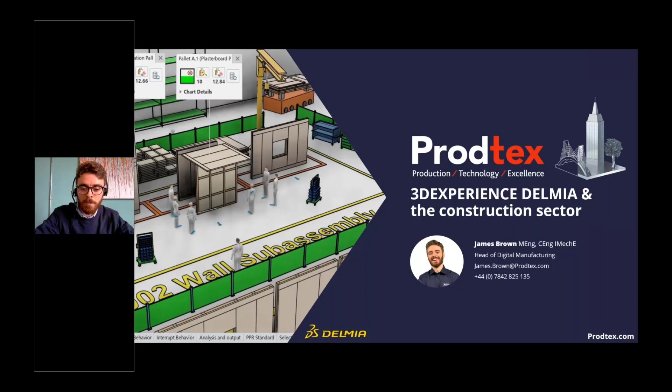Before we dive too deeply into it, for those of you who don't know who Prodtex are, we are a company based in Northern Europe. We specialize in construction, infrastructure, aerospace and automotive. Our prime focus is Delmia digital manufacturing, both as a license provider, a trainer of the software, and we also offer expert consultancy in how to use it and to help solve customer problems, which you'll get a flavor of through this series. And then just to mention it, we also do work in robotics and tooling. I always like to mention that as it means we're not just using the software, we also understand the same issues you go through as manufacturers as well.

So as Ricky said, really exciting 2 weeks. We've got 2-3 weeks we have planned for this webinar series. This is going to run through a range from factory optimization off-site all the way through to on-site ergonomic assessments and on-site simulations. Today's session, we're going to kick off with an introduction to 3DEXPERIENCE Delmia to really kind of give you that grounding for the rest of the webinars.

So in this specific session today, we're going to run through some of the key trends that we've seen in construction from our point of view. This is based off work we've done with different customers and the trailblazers on the call. And I spotted some of you in the attendees, so thank you, you know who you are.

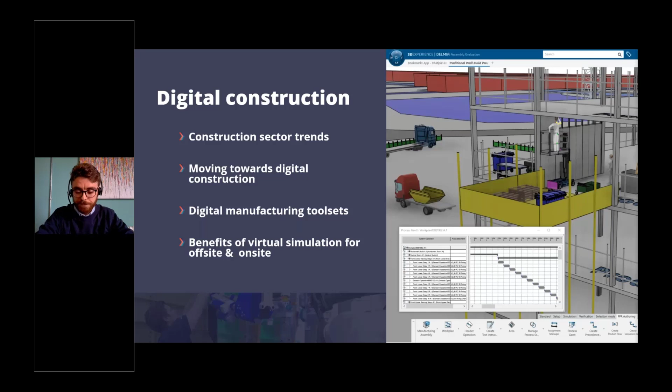So to introduce kind of a sector problem, usually when a customer approaches us for this sort of work, they either want to move away from project-driven construction or they have no idea they're doing it, basically. So some of you are probably thinking, what is project-driven construction? So I've put together a really basic scenario here, it's simplified a bit, but I think hopefully it's easy to understand.

So usually with a project, you're going to start off with some architecture for a building. You're then going to move into design for construction. So this is a phase where you need to turn that architecture into something that is real, basically. We're talking about adding rebar, structural elements, detailing of architectural things, and really bringing this thing to life. And this process can take a long time. There's a lot of learning there, a lot of work, basically.

And then once we know how this thing is going to be built and what we want to build it from, we then need to account for the equipment, the crews, who we're going to use, when we're going to use it, is that available at the time we need it, all of that sort of detailing. And then at the end, once we've done that, we then build the building. So you take this with a pinch of salt because obviously some of these things can happen in parallel. But yeah, so the big thing with this for project-driven construction is through that process we've just gone through.

We're really focusing on the site at the end. So this is us solving all the problems for just this site. And then you've completed the job. Hopefully you've done awesome work and you can pat yourself on the back. And then we get another job and we go through all of those lessons and challenges again. And then we go to another job and repeat the process again. If you're lucky, you'll get some of the same people from previous jobs who have the experience.

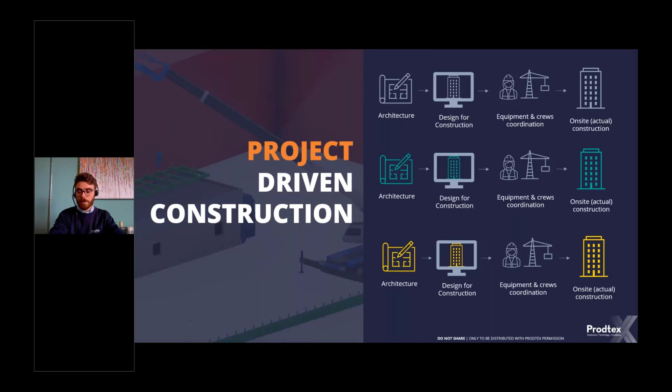So the thing we've been pushing is a kind of revolution in the sector: product-driven construction. Rather than considering those same 3 sites as individual projects, if we look across all 3 of those buildings, we can start to identify some repeat products and modules across the whole site. We're looking for products or processes that are happening hundreds or thousands of times again and again and again.

Once we've identified that, whatever it is, we can start to do some product development in R&D to either optimize an existing solution for a product, or we might even develop our own as a business. We might say, we can do that better, let's try build something ourselves. And then once we've done that, we can add that to a library, and all that know-how around that product, all those issues, are captured, but we don't stop there.

Using Delmia, we can start to do some on-site DFMA and installation, where we basically want to assess how this thing is going to be installed on site, what it looks like, where the worker safety issues are, what equipment you're going to use. We get to really granular detail around the real installation process of this thing, and all digitally before you've had to invest loads of money, which is good. And same thing, we capture that know-how into a library, so this is stored in your business again.

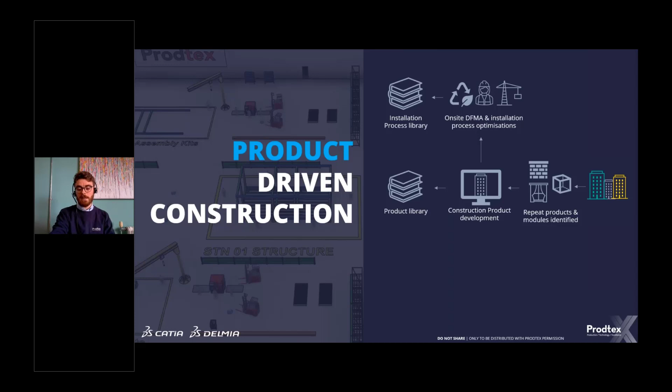And then if you have sufficient volume, you might also be considering making this thing yourselves, or how can you improve the prefab process in a factory. So then we basically go through that same iteration again of how can we improve the resources, how do we lay out the facility, what does it look like, really optimize that, and again capture all that information in your business. And then together now, we have a library of product data, on-site install data, and off-site fabrication data.

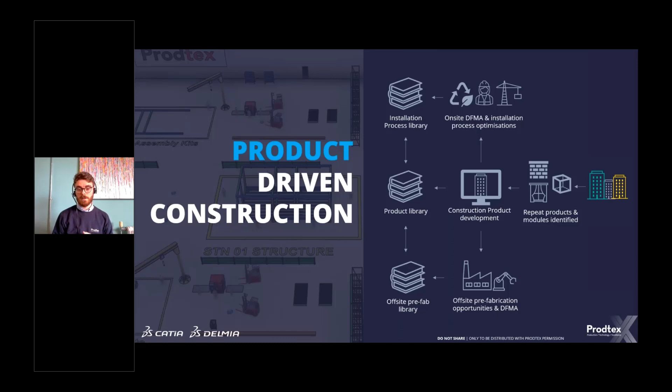So now we have this kind of unified library with loads of information in your business, which is awesome. But then how do you use that library? So now we've built it, we've identified something, let's take it into the world. So you might have multiple site opportunities. This could be 4 or 5 projects or more, or even just one massive project where you've identified you can deploy this product to your site, or these opportunities.

Once we've identified that, we then need to do what's called configured product design, where we will take this standard product and tweak it and adjust it to fit the customer's requirements. Usually there's going to be some specific architectural requirements, where a wall needs to be a certain length, a certain height, an MEP unit needs certain things in it which you can configure. If you're doing something really clever, you might even do some parametric design. I won't have time to cover that in this session, but I'd recommend you go to the CATIA AEC channel on YouTube, where Jonathan Usher has some great videos on configured products, so check it out if you've not seen it already.

So we don't stop there. We're going to do some site simulations. This might be for specific restrictions on a site, like a really tight loading area, or a specific tricky bit, or even a common thing for us: how do we actually flow the build up of this product through the site? If you have 2 wings of a building, do you put 2 crews working parallel, or have 1 crew working back on themselves? That sort of high level sequencing we can simulate and optimize, and similarly you might do the same sort of stuff for the factory, which I'll cover later. And then you build the building based off all of this configured product data, all of the great prefab stuff, and your simulations which have taken out the risks for site.

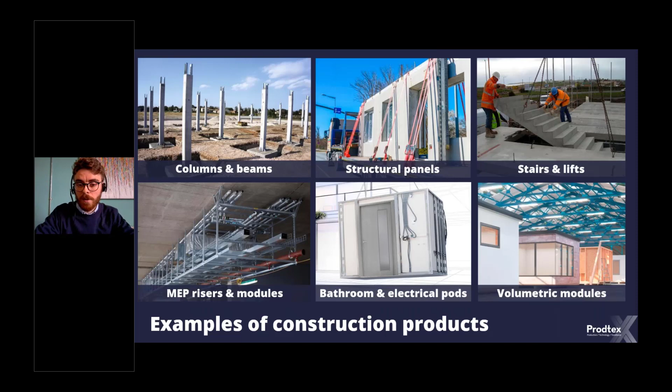Cool. So moving on to the tools, what can we use to do this? I'll give you a brief intro today, and then the rest of the webinars will cover it in detail.

If you've never heard of 3DEXPERIENCE, this is essentially, this is my take on it, it brings all forms of data together into a single area. I'll touch on that again in a moment. It's about bringing all people together from across the business and suppliers into one location. So it's no longer just designers, no longer just manufacturing or sales and their little bubbles. This is bringing everyone into one platform.

And the third, arguably most important point is you've put the people and the data together, but now you need to give them the tools to use that data and create something amazing. So 3DEXPERIENCE has a suite of tools that you can use to solve anything, pretty much.

And the biggest thing with this is data is really the backbone of 3DEXPERIENCE. It's all about the data you're putting in. It's not a magical software that will just type in solve my problem and it will happen. You feed it with data, and this is really going to bring you to data-driven decisions in your business later on, depending on what you're doing.

And some people often ask me, why now? Surely this is obvious, bring people together, tools together, data together, why now? This has been developed since 2012 by Dassault Systèmes. I would say computers have never been better now. The past 4 or 5 years, they've really jumped ahead to enable this large construction stuff, and the software has never been better as well. So you're really at a precipice point now. If you're on this call listening to this, you can be the trailblazers leading the sector with this sort of information.

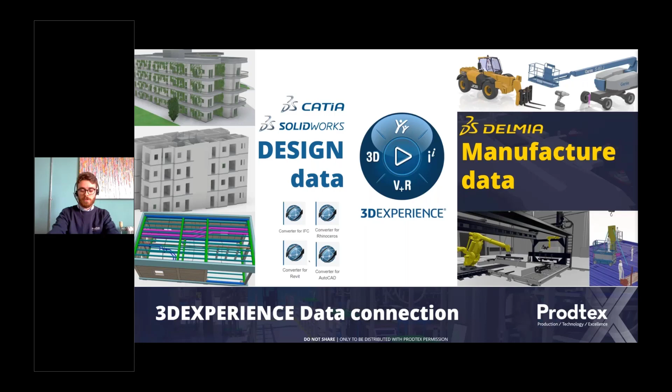So just very briefly, to run you through what that looks like when you're using it. We start off with an EBOM, or engineering design or architectural design, where we usually have some collaboration for us as manufacturing, either on-site or off-site, to understand what that product is and why they're trying to do it, and where the weaknesses and strengths are.

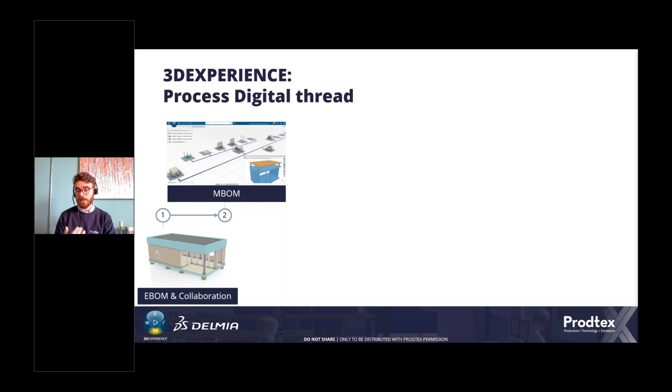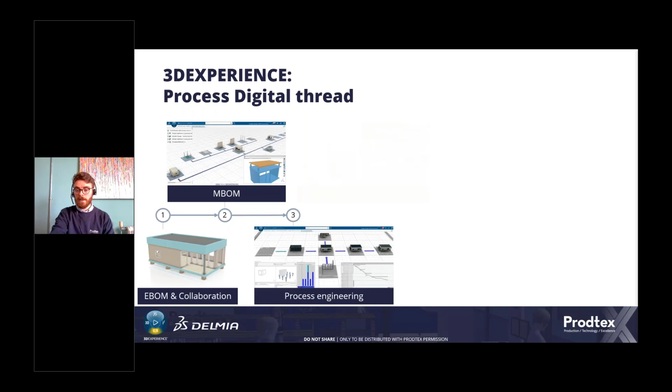We then do something called a manufacturer bill of materials, or sometimes called construction bill of materials, where we're going to break that product down into smaller chunks to manage it, which I'll explain further in a moment. We then do process engineering for sequencing, resource and layout for on-site and off-site. So this is bringing that data into the process.

And then after that, these kind of all happen in parallel, depending on what is your business driver. So some companies might really have a focus or a problem for your product with ergonomics. It's a particularly tall product, and how are the people going to reach it? How are they going to do it? What's the strain on their body?

So you jump straight to that assessment. If you're more talking about the factory, someone might straight away want to know about factory flow and the rate and the bottlenecks, and really care about their production line, in which case we would jump straight to that simulation environment to solve it. So those kind of elements on the right, you always need the stuff on the left to set it up and bring it in. Once you have it, you can really start to run with solving your problems.

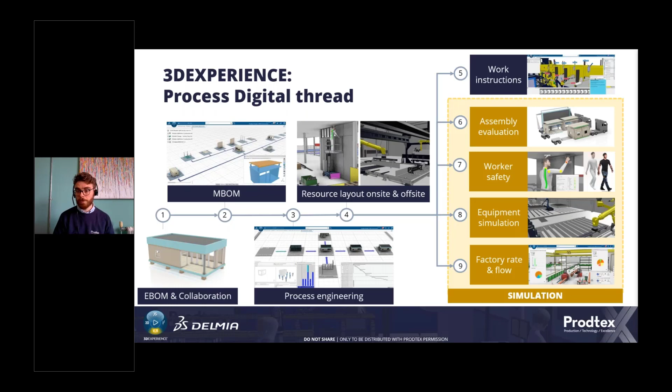And then briefly, just because I mentioned I'd come back to it, so for MBOM, as this is a tricky concept in construction, I always like to use the example of a well-known flat pack furniture supplier that most people will have built their furniture from in their homes. If you're building a table, and if you had a table and chairs, you'd probably expect to have 2 boxes turn up to your house.

So one box would contain the table, and one box would contain the chairs. Everything you need to build the table, you open it up and you build it and you do it. And the same for the chairs. It wouldn't make sense to have one box with all of the fasteners in, one box with all of the chair legs and the table legs and the instructions for the table, and the other one with the chair tops and the tabletop. You'd have to open up every single box just to build one of the items. That wouldn't make sense.

So we take that same principle into construction and bill of materials. So the example here on the left, you can see the product is on the top level, and then we have our modules that we need for on-site to install below that. And actually, even deeper within that, we need to manufacture these modules, right? So we then also have our off-site modules, which we need to produce as well.

So this is just a way of breaking up the product. And then, of course, we can consume this into our sequencing and our process to start to get an idea of how this thing is going to be built and what it looks like. And as you can see, it's very, very visual. So we found this has been really valuable for all of our customers.

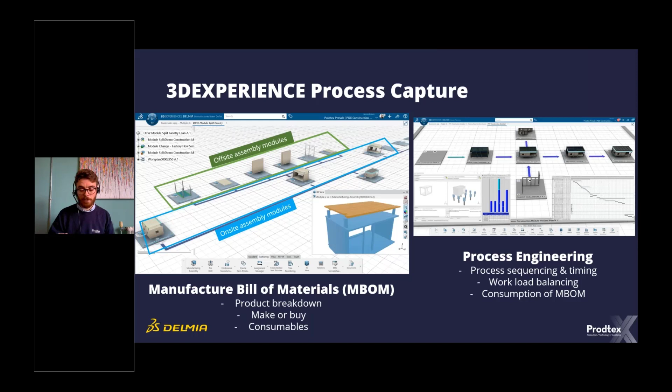Cool. And then for free, you get this kind of 4D build up if you've gone through that process as well. So I'm more highlighting this. I won't run you through in detail what's happened here, I'll save that for the other webinars. Just highlighting that these are the 2 products that we'll demonstrate to you in the rest of this series.

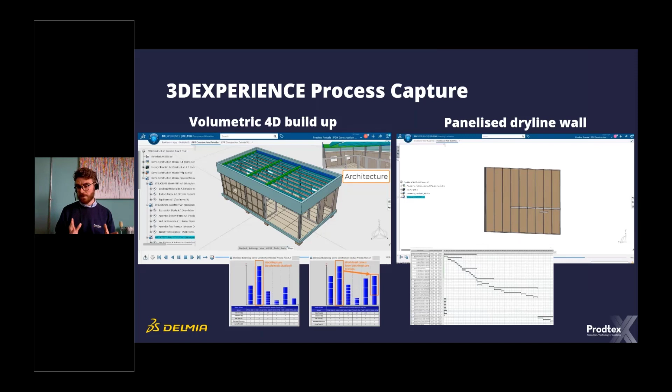So you have the volumetric 4D build up on the left, which is representing a kind of garden studio, outside office sort of thing, as one unit. And then we also have a kind of dry lining architectural wall on the right, which consists of studs, plasterboard, insulation, things like that. So we'll show the factory for the one on the left and the on-site installation and optimization. And then we'll also show on-site for the right and identifying a new potential opportunity with that as well.

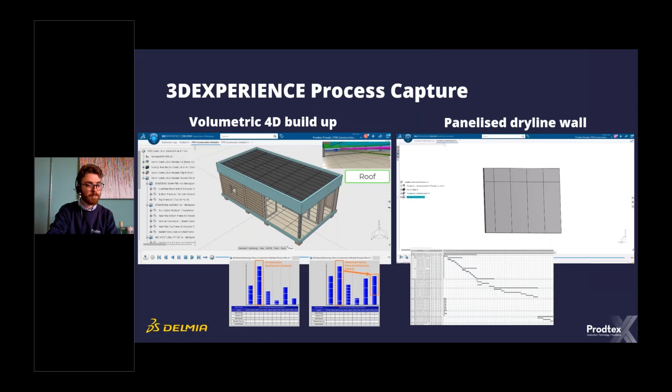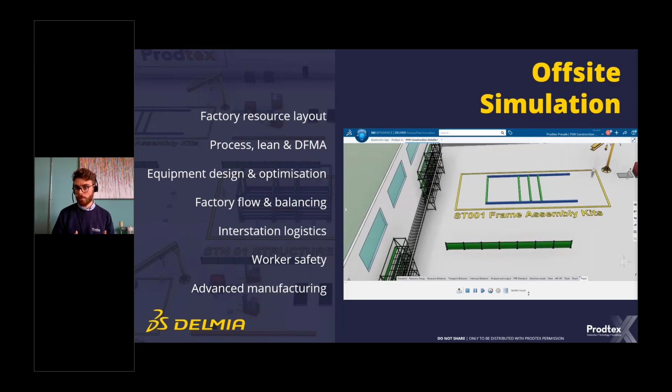Cool. So for this session, I was trying to put together what some typical value is for on-site and off-site. So why should you do an off-site simulation and an on-site simulation?

So for off-site, the typical issues we've seen, or reasons for a business to get involved with it, would be things like factory layout. So does it fit in the building? Where do the stations go? Where's the material going? Can I actually get the product out the door?

Customers on the call, you know who you are. I've gone through that with several customers now. We've realized the product can't fit out the factory door because construction stuff is big. So what are the constraints in the factory?

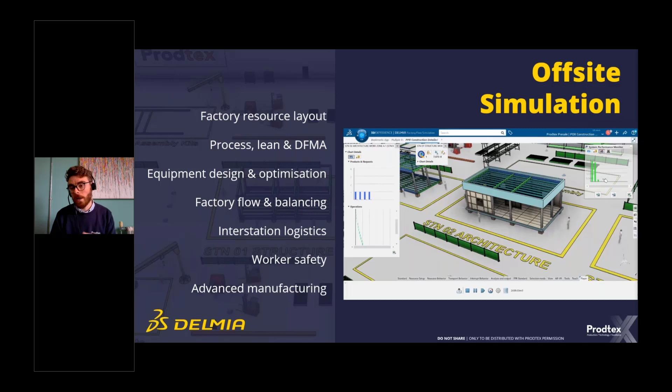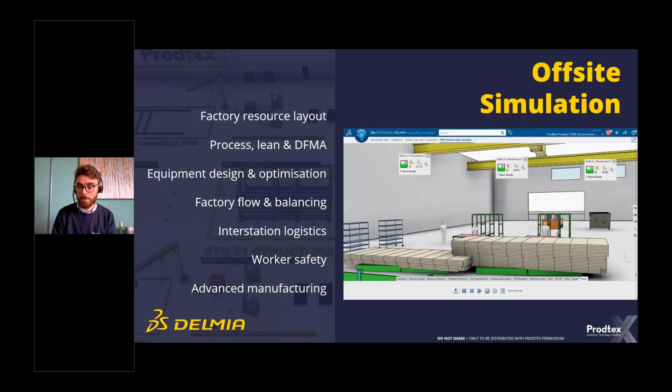There's also the interesting thing around simulating the processes in the factory, so making sure you're using lean principles. For example, making sure the material and tools are where they need to be used, when they need to be used. It doesn't make sense to have your drill on the wrong side of the factory - bring it to where the operator needs to use it to build it, to reduce time waste.

Another huge topic for factories is DFMA, or design for manufacturing and assembly. This is a massive topic of, can you actually build the product? Does it need to be split into further subsystems? How many subsystems? What equipment are we going to use? That sort of thing. So DFMA, especially in construction, is huge at the minute.

And the last one, which has been quite a popular one, I'd say, is advanced manufacturing - looking at different opportunities for automation for high volume products. This could be full automation with robotics, or it might even just be using clever things like jigs and tools and fixturing to kind of lean out your process to hit a full production. This is kind of piggybacking on the awesome work from aerospace and automotive that we've seen as well.

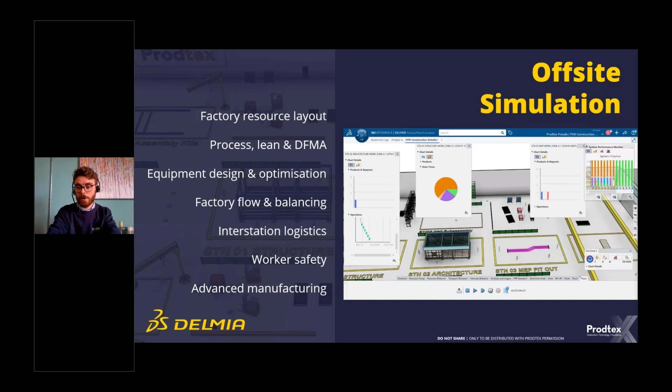Cool. And then for on-site, so same sort of thing - the kind of big value points for us we've seen businesses doing this is typically they want to understand the site layout. Can you get the resources you need to fit in the locations they should be? If you have a big piece of equipment, can it actually get into the space that's needed to be used? Where are the material buffers? Are you using canty decks, buck hoists, forklifts, that sort of thing?

A huge topic is worker safety. Unfortunately, we all know the problems with construction, that there still are injuries and deaths in this sector, and it's a big issue. Using the ergonomics tools in Delmia has been massive for us to check if something is safe, see if it can be improved, see if something does appear safe, but actually they're doing that process hundreds of times, and across a week, it will cause that operator an injury. So finding these issues and finding ways to make the sector safe has been bringing our customers huge value and a huge impact to their business.

And the final one, there was obviously more on this screen, but I'll run through a few key points, is understanding how to actually install a product in the field. So you've identified that, you have this wall - how are you actually going to build it? How do you simulate it? What's all the steps you're going to go through?

And there's two key values with doing this. The first is it obviously captures the know-how of how you install that product in the field and the resources associated with it. But the second huge thing for me has been a communication tool.

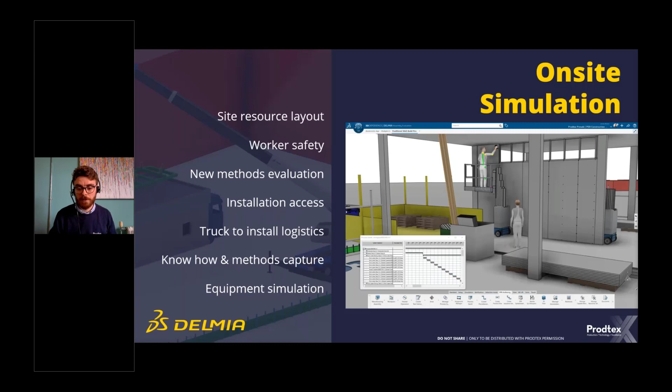Cool, so that's most of my session done. We have a few minutes at the end, but that was me introducing 3DEXPERIENCE for Delmia and the AEC sector. Hopefully you found that interesting.

We have a couple more webinars coming up, three based on the volumetric product. The next one this Thursday looks at the volumetric product in a factory, with great work from a colleague showing an on-site simulation where they've asked us to install it outside the building digitally. We'll show that process, then get feedback from the field and use it to optimize the factory further in the third webinar on the 5th of May.

After that, we'll move to our second product, the walling system, showing the on-site installation process of the traditional wall and finding opportunities to lean it out and improve it. This will be followed by a micro factory concept - rather than a full factory, how could we install a mini production line on site to smooth things out and make it more efficient? That will finish with a new product where we've done pre-assembly or prefab on site in the micro factory, showing how to install it and what improvements compare to the traditional approach.